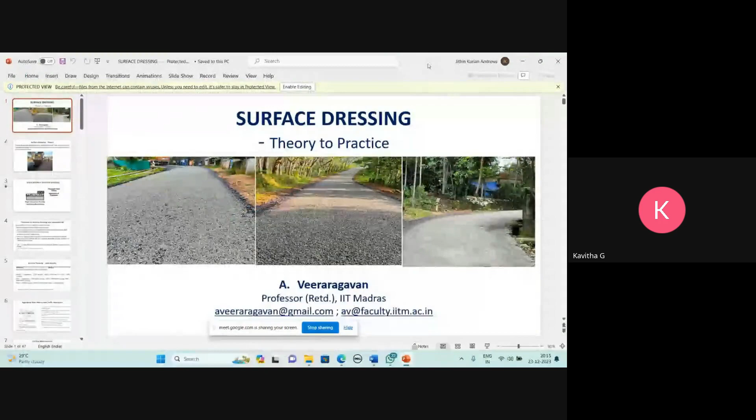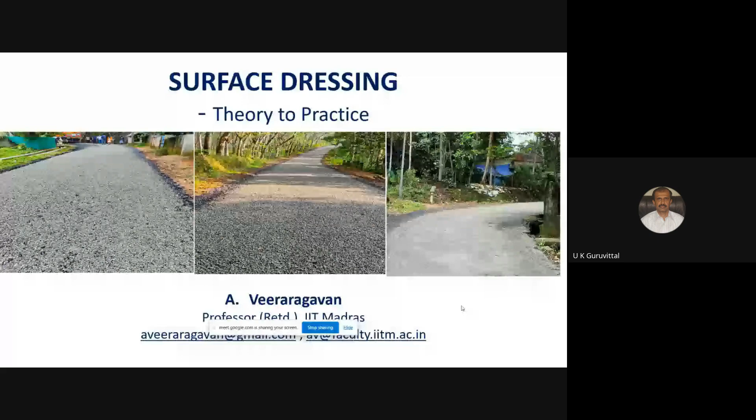There's an issue sharing the screen. Is my screen visible? Sir, it's not visible. The organizers must enable his screen sharing. Will you please enable me to share my screen? Is it visible now? No, sir, not yet. Shall I log out and log in? Screen sharing has been enabled for everyone, I believe, but that was not visible. I have to choose what to share with Google - Chrome tab, Windows, or entire screen. You can share the window. Then the PPT. What about the entire screen? You can try that. Entire screen also I have shown, but it's still not visible. Why am I not able to see my share? You can send the file to the organizer, they can share it. Try logging out and logging in again, sir. Let me try that, or else I'll send it to Jitin. I'll send the mail ID of the organizers, you can mail it to them. Let me try this. Jitin, check whether you've received the file. I received the mail, I'll share it in a minute. Good evening all. I'm very sorry that we did not rehearse sharing the screen before the webinar.

So what I'm going to talk about today is surface dressing, theory to practice. This webinar on surface dressing has earlier been conducted effectively by Professor Kandhal, and later by Professor Rajan Choudhary. Now it is my turn to share my thoughts on surface dressing theory to practice. What I'm going to tell is nothing new, it's all in the guidelines and specifications, but in about 30 minutes I will be able to present the theory, practical issues, and points for discussion.

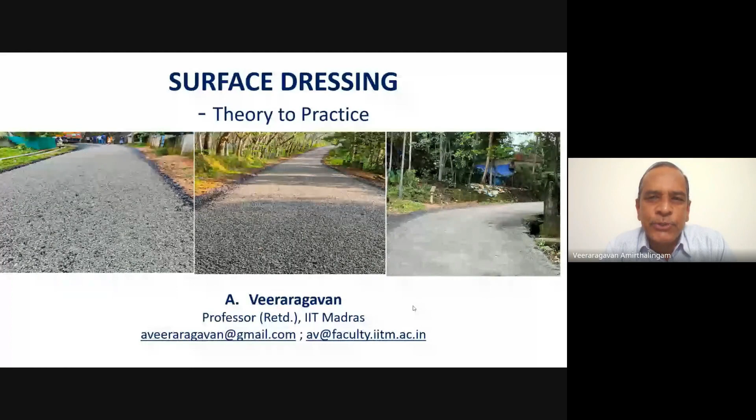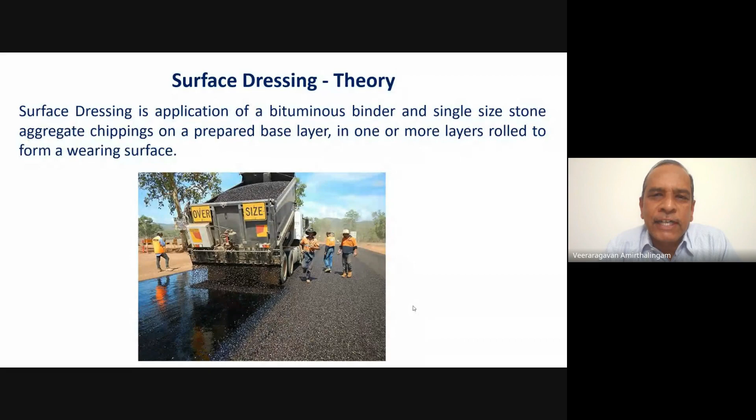Next slide. Surface dressing, as you know, is the application of bituminous binder and single size stone aggregate chippings on a prepared base layer. It can be in one layer or more than one layer, rolled to form a wearing surface. It can be used for all types of roads, from rural roads to highways. Let's go to the next slide.

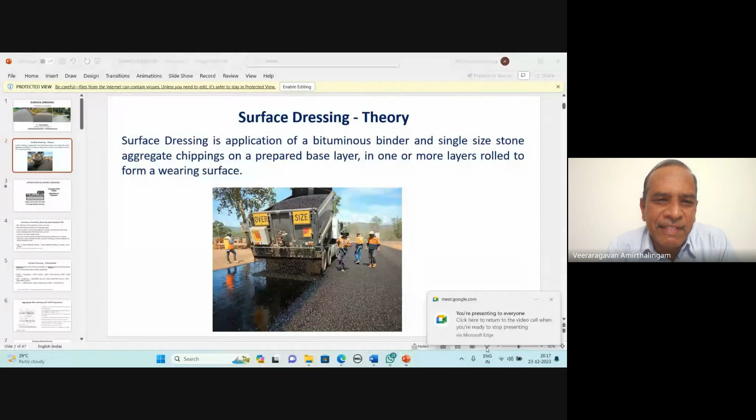Surface dressing is the application of a layer of binder on a prepared base, on which you spray a layer of aggregate and roll with a pneumatic roller. This is called single coat surface dressing or single chip seal.

On which you apply the second layer of binder and the second layer of small aggregates, which will key into the voids in the coarse aggregate, and then roll with a pneumatic roller. This is double chip seal or two coat surface dressing.

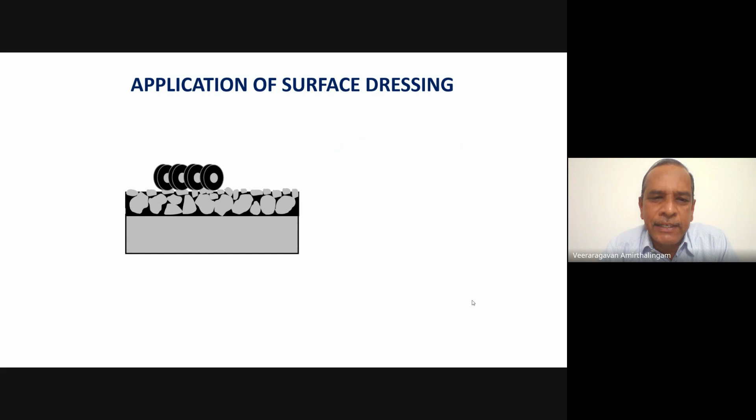So what is the function of this surface dressing and what is the expected life? It's a cost-effective treatment generally used to provide a dust-free wearing surface on a granular base. It will also serve as an impermeable layer to prevent entry of water to the lower layers. Thirdly, it arrests the disintegration of the pavement surface, and also provides a non-skid riding surface.

It can also be used as a renewal coat for periodic maintenance of bituminous surfaces. It will seal cracks, prevent raveling, and reduce oxidation of the previous or old bituminous layers. So generally, it is a very cost-effective surface treatment for low-volume roads, but can also be used as a renewal coat for high-volume traffic. Even as per the ministry, up to 2,000 commercial vehicles per day, this layer can be used.

The next question arises: what is the life of this surface dressing? As per the guidelines of Ireland, life can be 5 years for national roads, 7 years for regional roads, and 10 years for local roads.

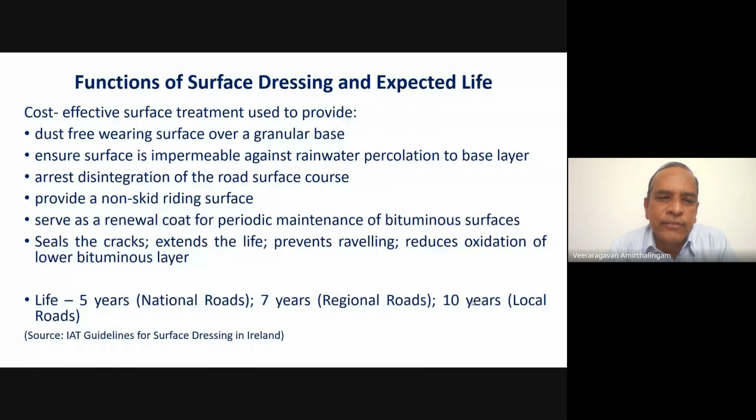What are the other limitations of this surface dressing in terms of riding quality? Remember, this surface dressing is a wearing course, generally used for low volume roads, and it does not enhance the structural strength, nor does it restore the riding quality of the surface having large surface irregularities. So if you expect a wearing surface riding quality similar to conventional BC, you may not get it, but it is comparable to thin layers.

The roughness for a very good road as per IRC 82 is 3,200 millimeters per kilometer, comparatively for MSS it will be 2,600, and for premix carpet it may be 2,800 millimeters per kilometer. For a fair road it can be between 3,200 to 3,800, whereas for MSS it may be from 2,600 to 3,200. For a poor road it can be more than 3,800.

So generally, it may not give you a smooth surface, but it will be a durable, long-lasting wearing course, especially for low volume roads.

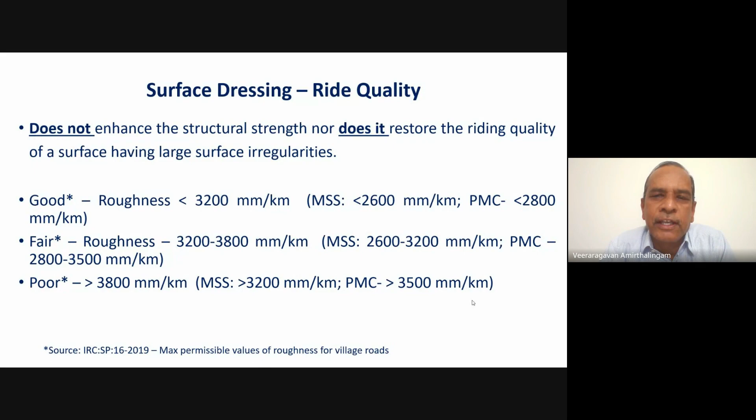So what we do is apply a layer of binder. There is something called the average least dimension of the aggregate. If the aggregates are stacked on a surface, the average dimension is considered. This again depends upon the hardness of the surface and the traffic level. We should select the aggregates accordingly.

Initially, when the aggregates are dropped from the spreader, the voids will be around 50%. After rolling, it reduces to 30%. And with traffic, finally it may be around 20%. So the optimum thickness to which the binder can be spread can be about 75% of the vertical dimension of the aggregates. If you have more binder, it will result in bleeding. The binder's function is only to hold the aggregates together, and if you have less binder, it results in raveling and loss of aggregates.

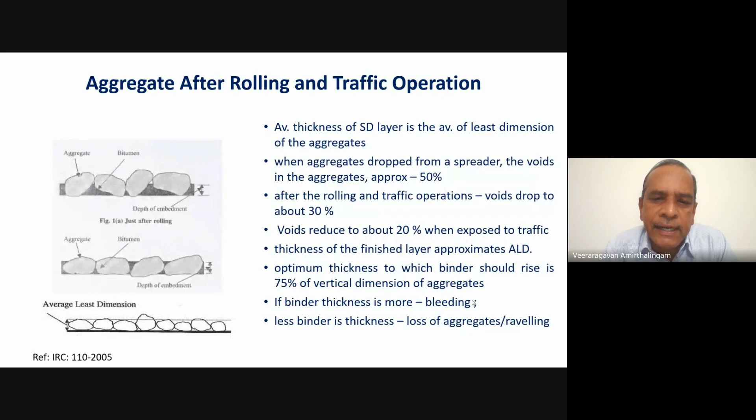What are the grading requirements? Generally, as per the specification, there are 4 gradings: 19 millimeter, 13 millimeter, 10 millimeter, and 6 millimeter. These are single size aggregates. 13 mm means passing through 13.2 and retained on 9.5. Passing 10 mm size means passing through 9.5 and retained on 6.3. Even though there are 4 gradings, generally we adopt 13 and 10. 19 is permitted depending upon the traffic level and hardness of surface, and 6 is generally not used, though specifications exist and we can choose them as well.

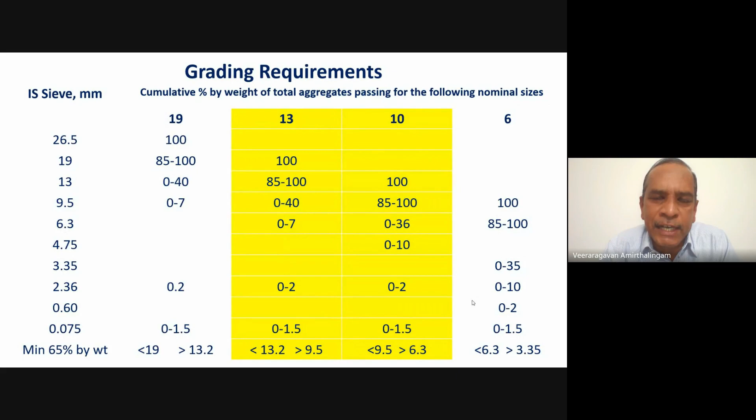So where can it be used? We can use either a paving grade bitumen or a rapid setting emulsion. The weather conditions recommended per specifications: minimum air temperature for paving grade bitumen is around 16 degrees centigrade, whereas for rapid setting emulsion it can be 10 degrees centigrade. The surface should be dry whenever you use a penetration grade or paving bitumen, but it can be dry or damp when using an emulsion.

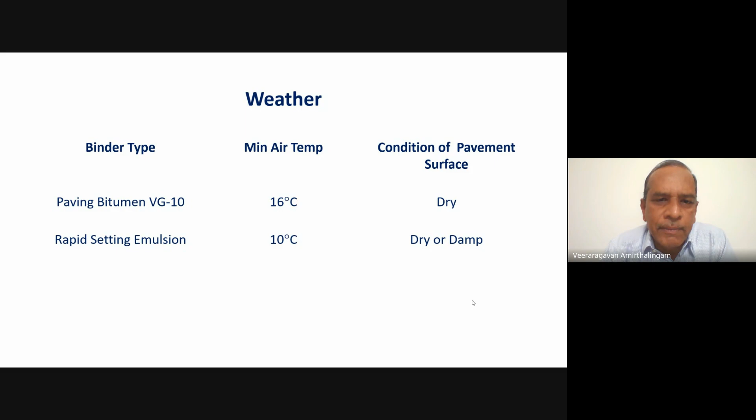For any pavement wearing course that you want to lay, you have to prepare the base. The surface has to be shaped because surface dressing will not ensure a good, perfect profile. The profile should be made up in the base course, which can be water bound macadam or wet mix macadam.

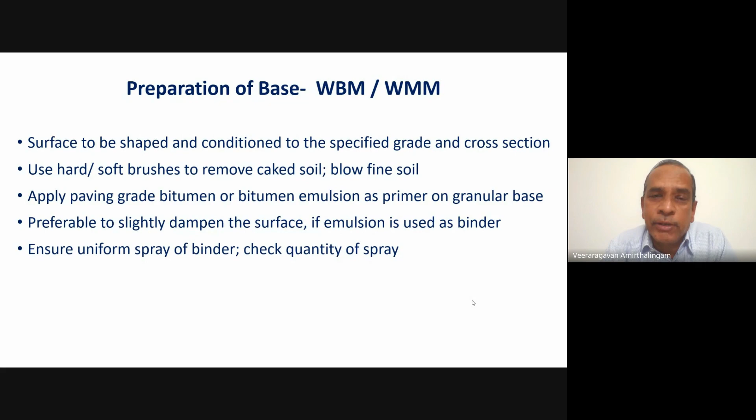You have to use hard or soft brushes to remove the caked soil or blow away this extra fine soil. You can apply either a paving grade bitumen or an emulsion as a primer on a granular base, preferably slightly dampened whenever you use an emulsion as the binder. But you have to ensure uniform spray of the binder and check the quantity of spray.

These are the quantities of binder to be used for primer. For wet mix macadam and water bound macadam, as per specifications, the rate of spray varies from 0.7 to 1. For a mechanically stabilized base, it varies from 0.9 to 1.2. For a gravel base, crusher run macadam, or crushed rock base, it can vary from 1.2 to 1.5. So before you apply surface dressing on a granular layer or a stabilized layer, the prime coat must mandatorily be applied.

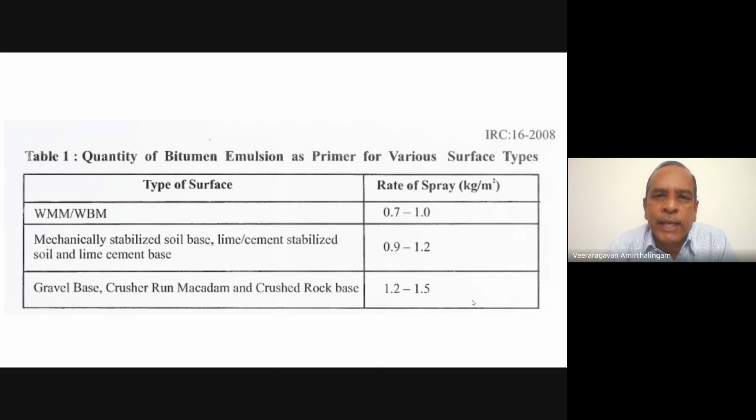The binder, as I mentioned, can be either a paving grade bitumen of VG10 or a rapid setting cationic emulsion. The temperature at which this can be applied is 165 to 175 degrees centigrade for paving grade bitumen, whereas for rapid setting emulsion it can be between 50 to 70 degrees centigrade. The bitumen content should be at least 65% by weight as per IRC 110/2005.

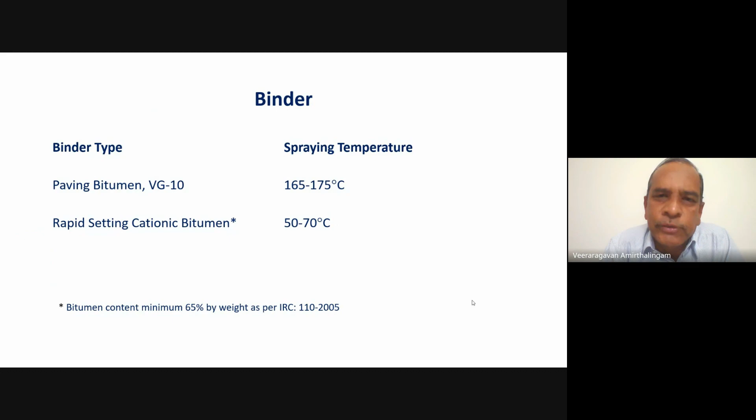The aggregates, as I was mentioning, are single size aggregates. 13 means 13.2 passing, retained on 9.5. 10 means passing through 9.5 and retained on 6.3. These are the two most commonly used aggregate gradations, which is why I'm not talking about 19 and 6.

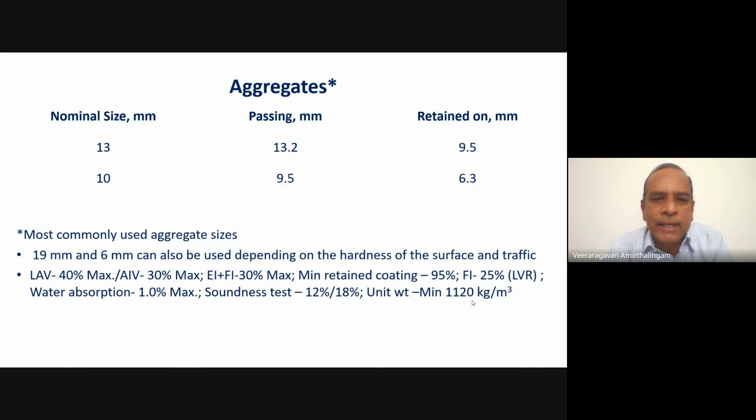This aggregate should be clean. This is an issue that needs discussion at the end. The aggregate should be free of dust. How to ensure the aggregate is free of dust is a question I think we'll discuss with the panelists. Washed aggregates are preferred, but we have never been washing the aggregates, so dusty aggregate will be an issue.

Second, the mechanical spreader should be calibrated. You have to apply the aggregates at a uniform rate as per specifications. Here again, you can use either uncoated aggregate or pre-coated aggregates. Generally pre-coated aggregates are preferred, but again the field engineers have their issues and concerns on pre-coating the aggregates. This is a second point which I request the panelists to consider.

Pre-coating is generally done with 0.75 to 1% bitumen by weight of aggregate. You have to cure it for at least 1 week before application. Since the dosage is only 0.75 to 1%, these pre-coated aggregates will be free-flowing, not sticky, and there's no problem with transportation either. But there can be some delay in setting of the emulsion, though not a very significant issue. So you can use either uncoated or pre-coated aggregate; the dosage of the binder will vary. These are issues that need debate and discussion at the end.

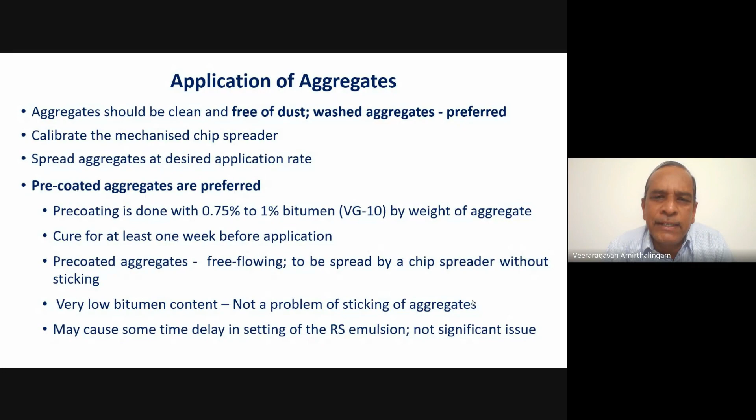So this is how you can see there are two cases wherein the binder is first applied. This binder serves as a waterproof layer, which is the most important advantage of this surface dressing. Secondly, you can apply aggregates. There can be issues where we don't have the chip spreader - how do you go about it? I am coming to that issue subsequently.

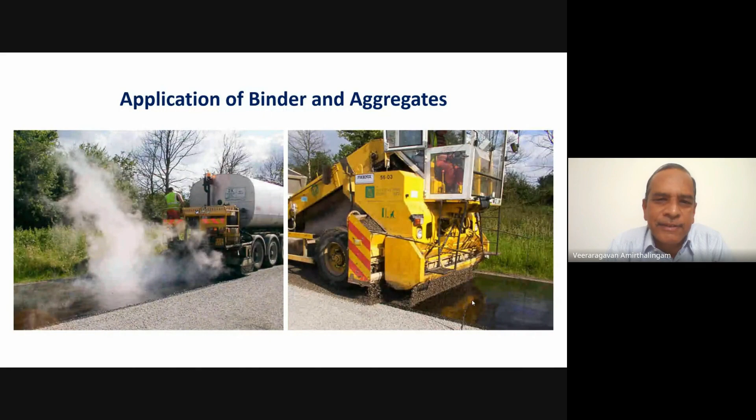As can be seen on the slide, on the left you first apply a layer of bitumen, on which you apply a pre-coated aggregate. On the right, you are able to see a chip spreader, which is an attachment to a tipper, which is also available.

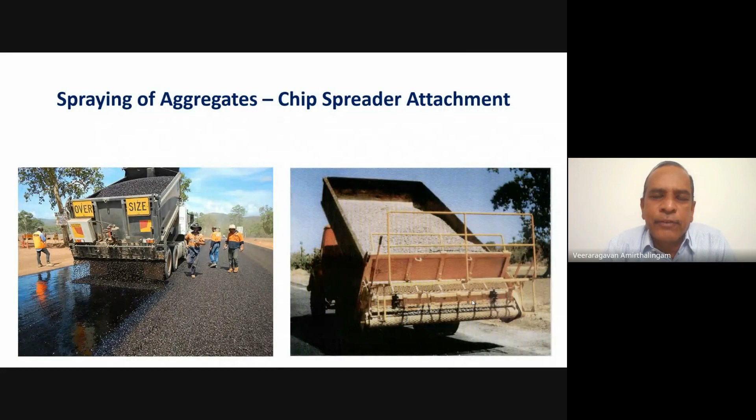You can use either pre-coated aggregates or uncoated aggregate as per the specification. But considering the advantage of pre-coated aggregates, it is preferable to use pre-coated aggregates. Let us talk about the issues and concerns of using pre-coated as well as uncoated aggregates.

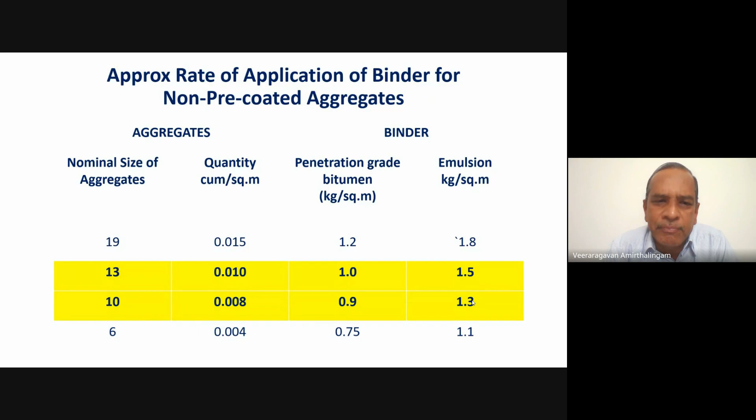The application rate for binder for non-pre-coated aggregates: when you have 13 millimeter aggregate using emulsion, it is 1.5 kg per square meter. When you use 10mm aggregate, it is 1.3 kg per square meter. When you use bitumen VG10, it can be 1 and 0.9 kg per square meter. But when you use a pre-coated aggregate, the binder quantities are 0.8 and 0.7.

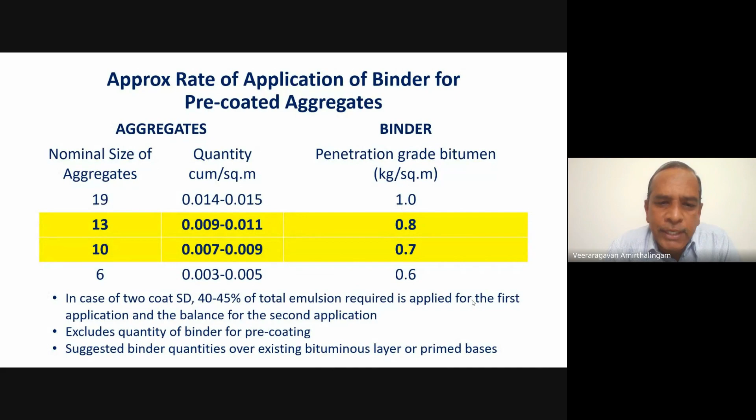In case of two coat surface dressing, 40 to 45% of total emulsion required is applied for the first application, and the balance is for the second application as per IRC 110. But this quantity that has been prescribed excludes the binder used for pre-coating. So these are the binder quantities for the existing bituminous layer or primed surfaces.

Rolling: the preferred rolling is pneumatic roller. We can also use a steel wheel roller, but when you use single size aggregate with a steel roller, generally the aggregates get crushed. Whereas a pneumatic roller has a kneading effect, ensuring better embedment of the aggregate on the binder layer, hence pneumatic roller is preferred. Professor Kandhal will further substantiate this with his experience on why pneumatic roller should be preferred over steel wheel roller.

You have to use a 60 to 80 kilonewton tandem wheel roller only if pneumatic roller is not available. Avoid excess rolling. Continue rolling until the aggregate particles are firmly embedded in the binder. This is the difference between premix and this layer of surface dressing: here the object is not to ensure density of compaction, but to ensure that aggregate particles are firmly embedded in the binder. This is possible with a pneumatic roller, hence it is preferred.

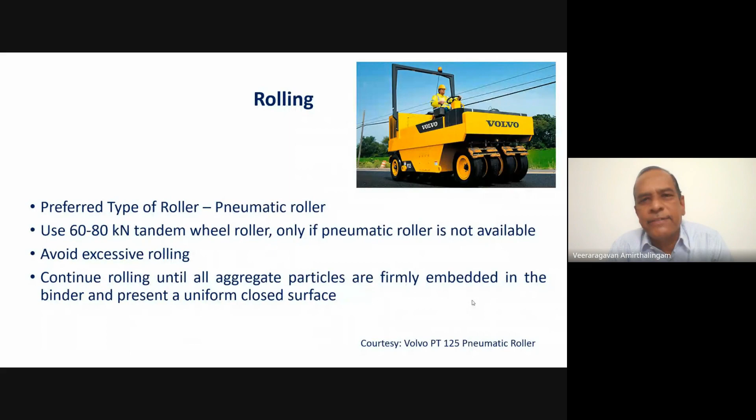The second coat of surface dressing is preferred in high rainfall regions as well as where traffic level is high. This should be applied after the first layer. Generally it is said the second layer should be applied after allowing the first layer to traffic for 2 to 3 weeks, but we have been attempting to lay the second layer simultaneously. This is another point of discussion we'll take up at the end.

The aggregate used should key into the voids in the larger size aggregate, as was shown. They follow the same procedure of applying the layer of bitumen and spraying the aggregates which will key into the voids in the larger size aggregate.

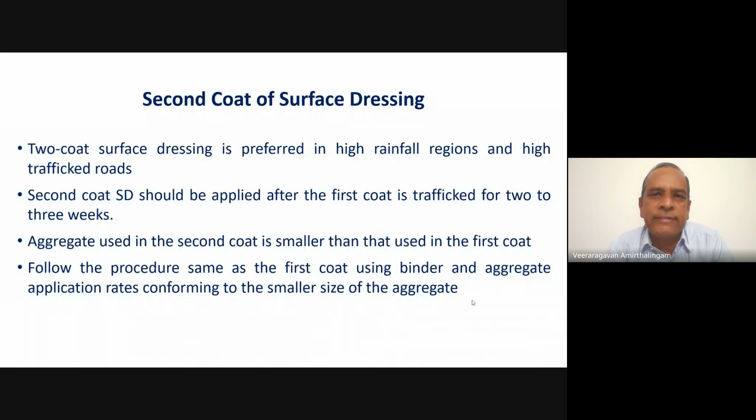After this, when bitumen emulsion is used, open the road to traffic not earlier than 4 hours after rolling, preferably after 24 hours. The general rule is to open the road to traffic on the following day. If unavoidable, limit the traffic to 20 kilometers per hour.

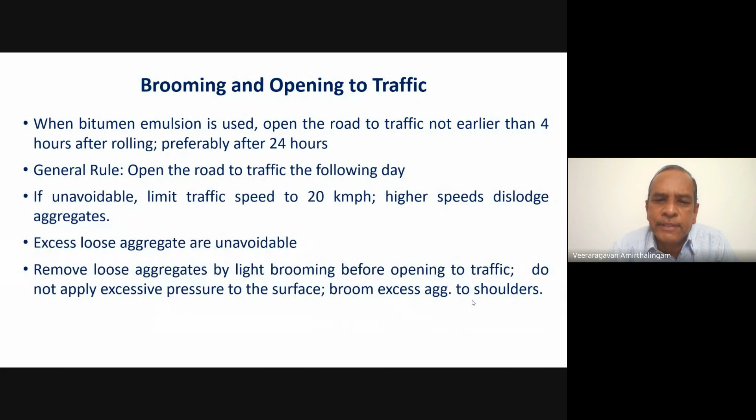Why limit speed? Because at high speeds, before the emulsion breaks, aggregates become loose. If you allow traffic, the aggregates will get dislodged, so loose aggregates are unavoidable. This is a common problem, a common complaint - whenever you lay surface dressing, there are loose aggregates. You can remove the loose aggregates by light brooming before opening the road to traffic, but don't apply excessive pressure to the surface. If there are excess aggregates, they can be broomed to the shoulders.

Quality control: any construction requires quality control. The quality control checks are very simple - check on gradation, check on binder application rate, check on rate of spread of the aggregates, check proper embedment of aggregates in the binder, at least 70 to 75% should be embedded. You check the spray of the binder using a felt.

You can take the weight of the felt before and after, that tells you the rate of spray. You can check the spread of aggregate using a tray, before and after. Also you can check the embedment of the aggregate, that at least 70 to 75% of the aggregate should have embedded into the binder layer. So these three checks can easily be done at the site - no costly quality control equipment is required to check the quality of construction in the field.

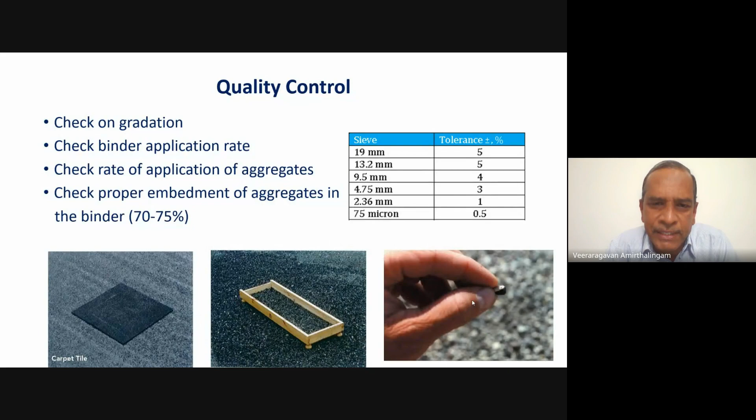The chip spreader calibration is also possible. You can spread a felt or cloth, take the weight before and after, that tells you the rate of spread of the chip spreader. This can easily be used for calibration of the rate of spread. Number one, the opening; number two, the speed of operation of the unit - both are to be controlled.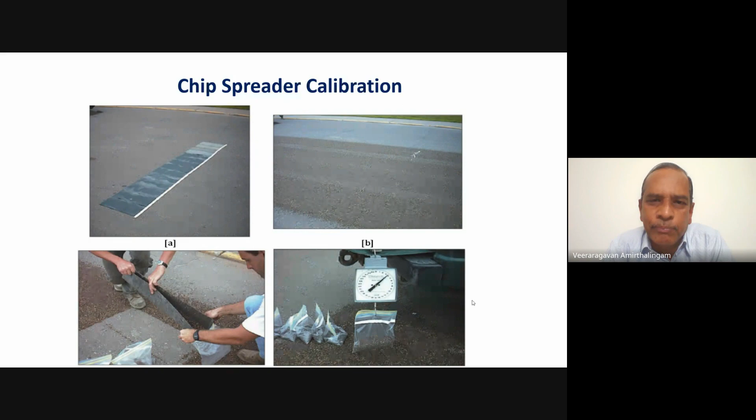Also, you should check the uniformity of flow of the binder. Check whether nozzles are clean, whether rate of spray is uniform. You can check the weight of the binder in these silos before and after spraying, which will tell you the quantity of spray of the binder. The rate of spread also needs to be checked.

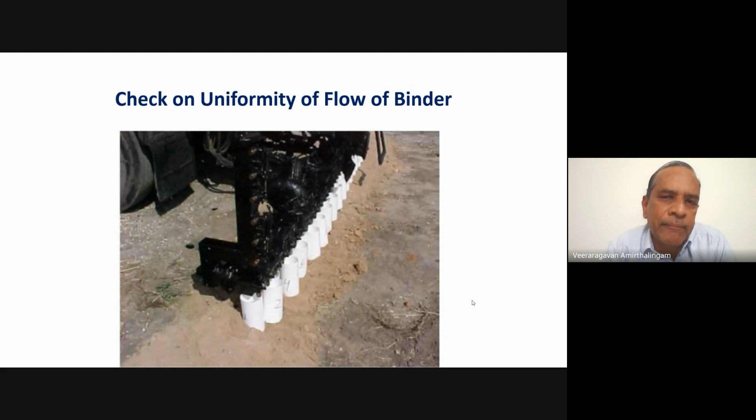There are simple tests to distinguish between rapid setting, medium setting, and slow setting emulsion, available in the do-it-yourself booklet prepared by Professor Kandhal and Professor Rajan Chaudhary. Mix about 5 grams of emulsion with about 100 grams of moist aggregate. If the mix can be made with almost 100% coating, it is MS or SS type. If the emulsion sets or breaks without coating the aggregate, it is RS type, which is generally preferred for surface dressing.

To differentiate between medium setting and slow setting types, about 5 grams of emulsion with about 100 grams of stone dust: if the mix can be made with about 100% coating, then it is slow setting type, otherwise it should be medium setting type. So you have to check what type of emulsion is used. Preferably, we use rapid setting emulsion.

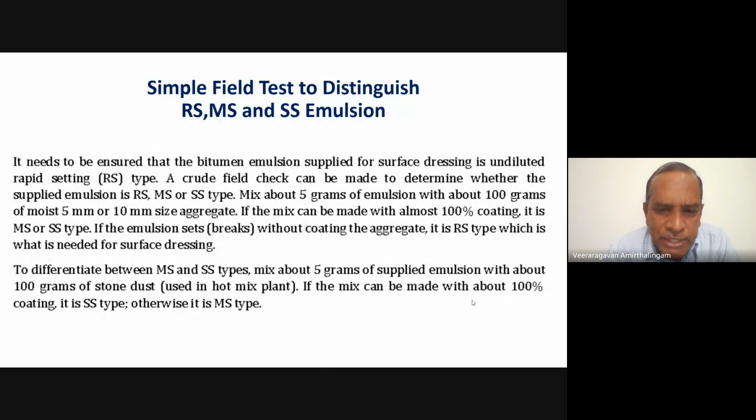This is the theory - how the binder has to be applied in two coats, rolling, and then opening to traffic. Now let us come to practice.

This is a section where surface dressing was applied using a chip spreader. As can be seen, the aggregates are dusty - you can find the dust flowing along with the wind.

You can also see the binder getting applied using a binder spreader, wherein some of the nozzles are clogged on the right extreme, so there is no application of the binder there. For ensuring good quality control, uniform spread of the binder becomes mandatory.

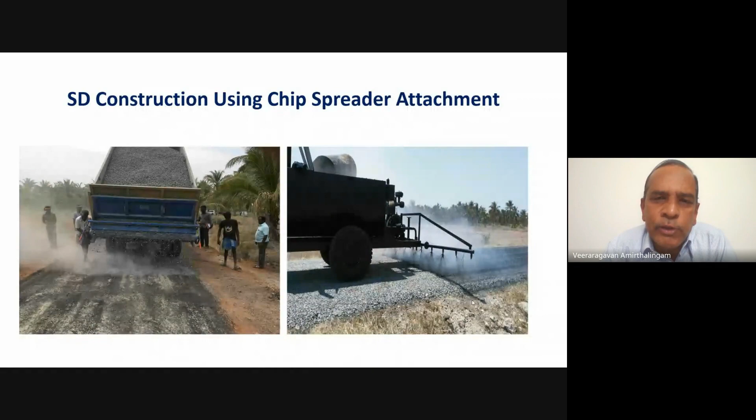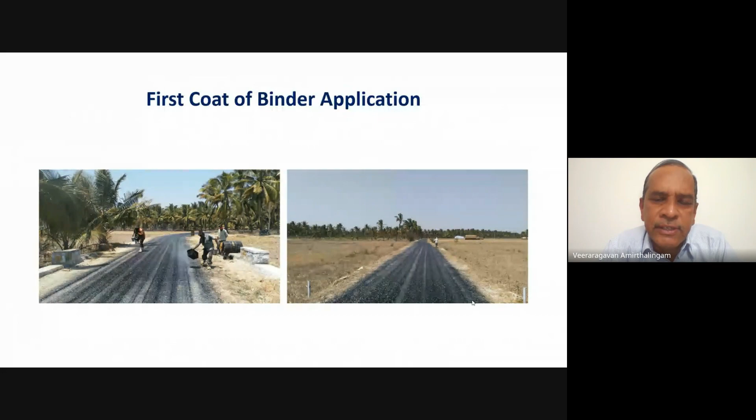Since the bitumen or emulsion has not been spread uniformly, you'll find that at some locations there is a white band, which means the nozzles are clogged and the spray is not uniform. So you may have to adjust by using a drum.

This is a chip spreader attached to a tipper. You can find that the road has got a good camber. The aggregates, single size aggregates, are uniformly spread on the prepared surface.

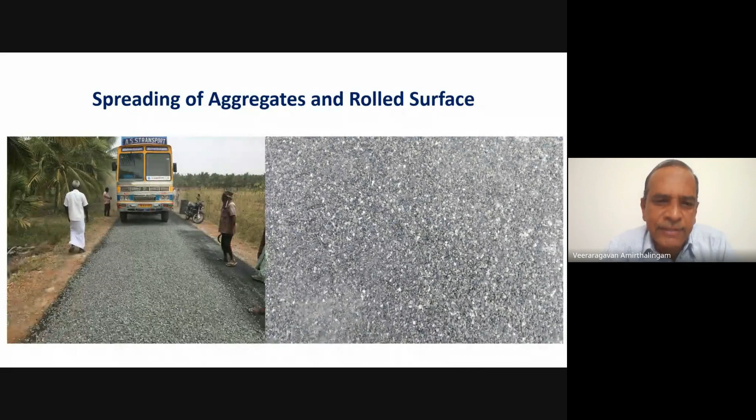But the issue at this point, in this section where we attempted to construct the surface dressing, was that it was over a layer of wet mix macadam. Unfortunately, for rural roads, they do not attempt a mix design for wet mix macadam, with the result that there's too much of...

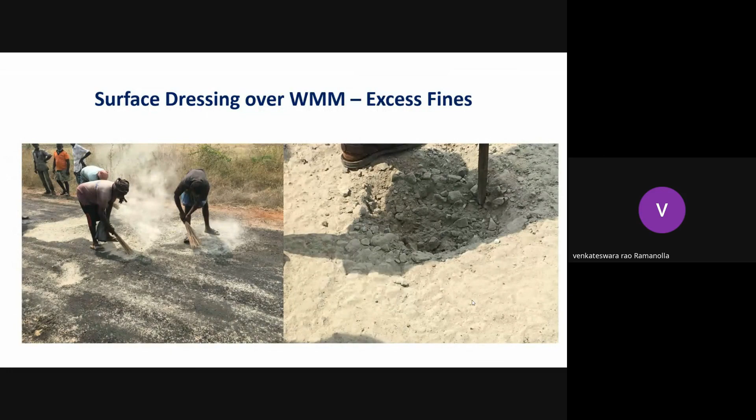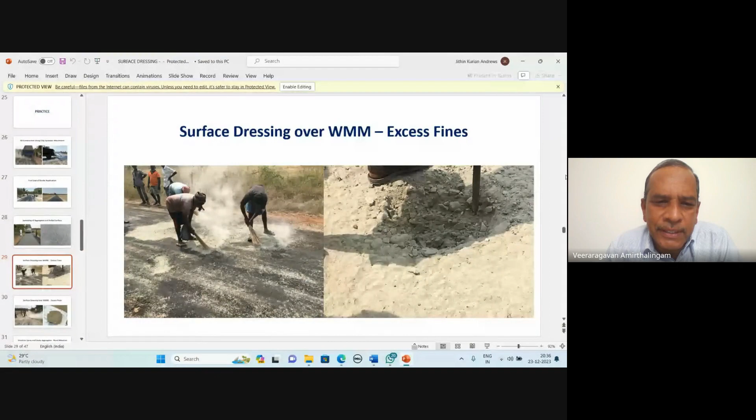You can continue, sir. Yeah, but yeah.

In the case of surface dressing, when there are excess fines, you can see that when it's getting broomed, you find too much fines on the wet mix macadam. The issue is that when you have excess fines in the wet mix macadam, all your primer will get into the wet mix macadam, and there is no binder left to hold the loose particles together and ensure bonding with the next layer being laid.

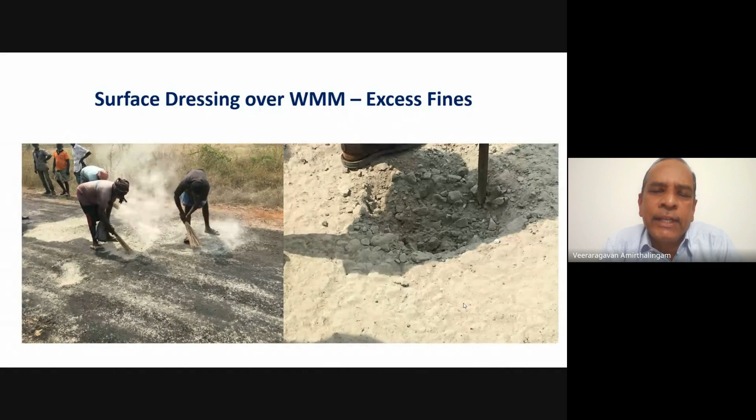You can see that when they're blown with a compressor, there's too much fines. Therefore, whenever you want to use surface dressing over wet mix macadam, ensure that there's a mix design and the fines are minimized as much as possible. You have to remove all the loose dust from the surface, and the aggregate should be exposed before you lay the prime coat and the layer of bitumen.

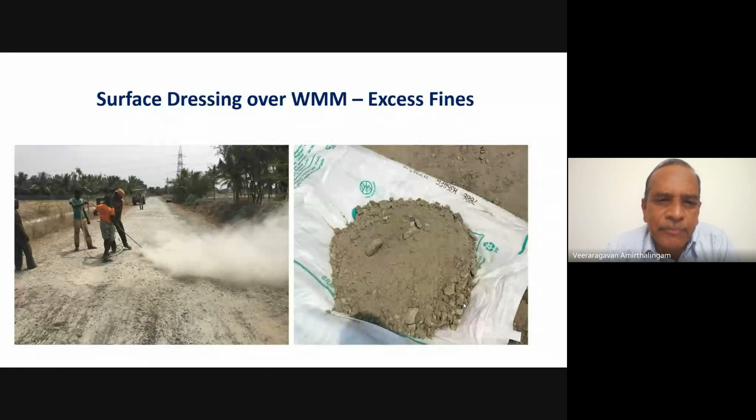You can see here that on both ends, the sprayer is not working, so there will be no bonding on both ends. As can also be seen, the aggregates are not washed - there's a lot of dust. When there's dust on the layer, it will not have embedment with the aggregate, or it will come out. This is one of the reasons why the loose aggregates come out when exposed to traffic.

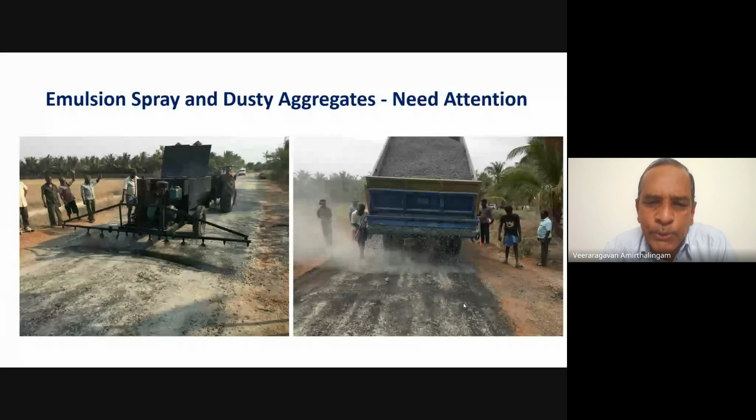This is a case of a mechanized emulsion sprayer and chip spreader being practiced in Kerala. Hincol has imported this equipment for demonstration purposes.

So it has got a tanker for the emulsion, a container to hold the aggregates, and a spreader. We can extend the spray bar up to 4.4 meters, so the width of the spreader can be controlled.

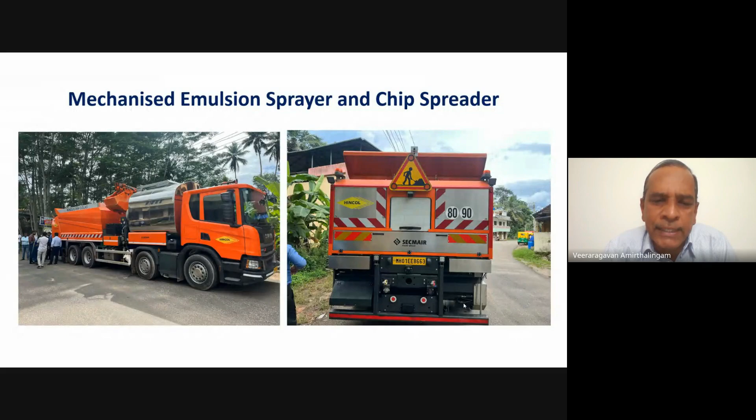Next, you can see there are two spray bars. The first one sprays the emulsion, the second sprays the aggregates. As shown in the earlier photographs, normally you apply a layer of emulsion, allow it to break, then spread the aggregates. But in this case, both are done simultaneously - the first spray bar sprays the binder, the second sprays the aggregate.

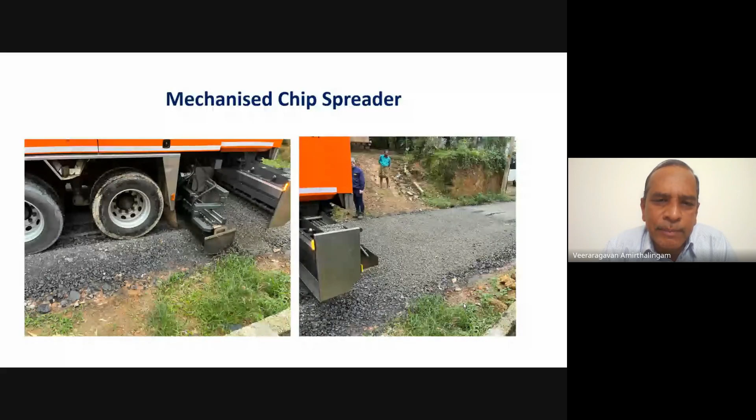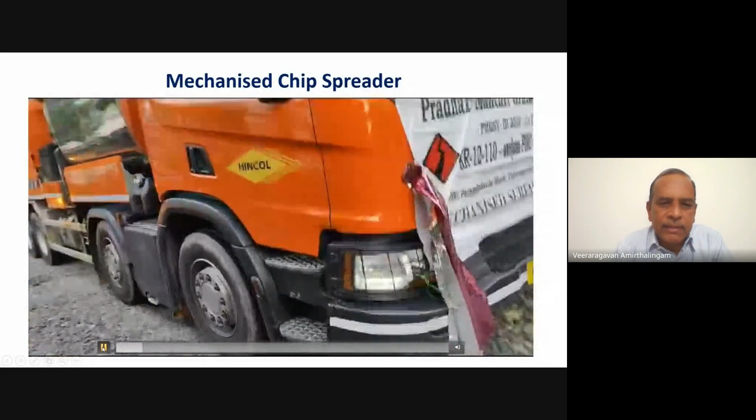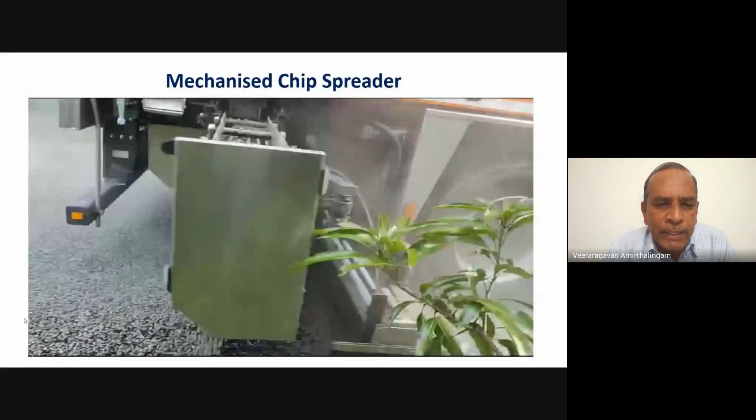As can be seen, you'll find a layer of binder followed by a spread of aggregates. Both are done simultaneously. Since there are adequate voids, the emulsion breaks and is able to hold the aggregates together. You can see the aggregate spray bar extended for the entire width of 3.75 meters.

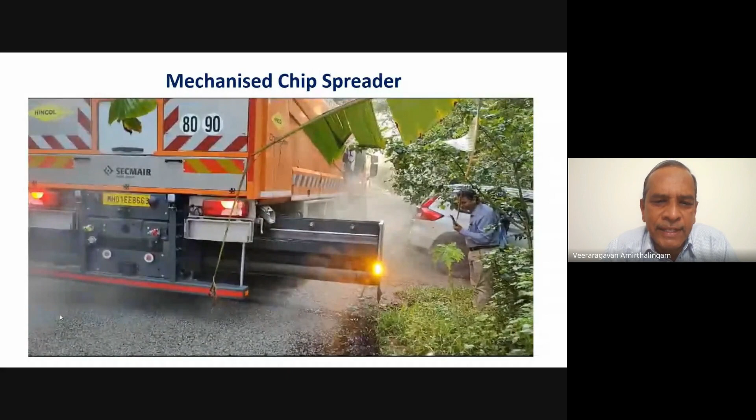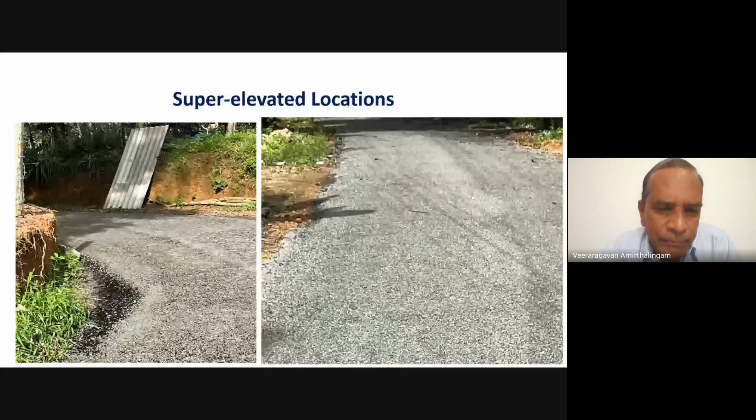This is the finished surface. One of the complaints we received was that the aggregates are loose. Secondly, in super elevated locations, the emulsion flows to the lower end. It's an issue, but not a major one that needs attention here.

Loose aggregates on the surface is an issue. As I mentioned in the beginning, loose aggregates will be there because not all aggregates get embedded. But if you use a pneumatic roller and compact well, it's possible most particles get embedded into the binder and very little loose aggregate remains. With traffic, the aggregate surface will be dry enough to take up the traffic.

However, when they tried to excavate and check whether the layers are loose, they found the surface tough - it's difficult to excavate any portion to check whether the bonding is there or not.

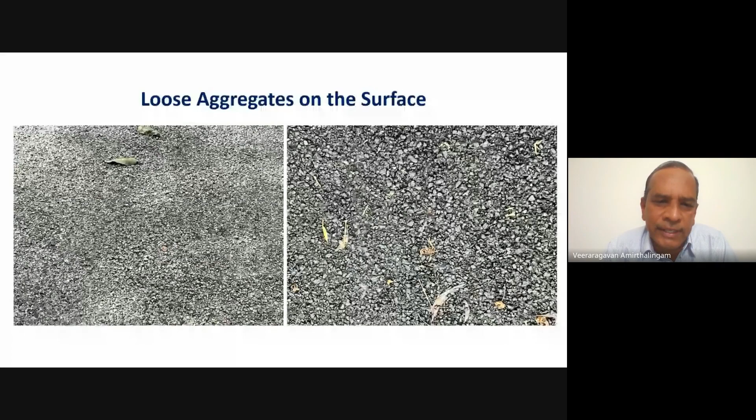So these are finished surfaces of mechanized surface dressing. I saw this last week in Kerala - it's good, a 2-coat surface dressing. Except for the loose aggregates, there cannot be any other complaints from anybody. With 2 layers surface dressing, this may be adequate to cater to low volume traffic.

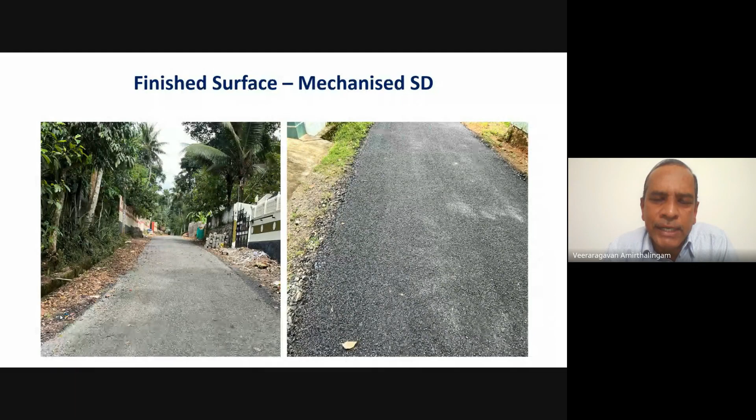If you compare with the Indian specification, in Ireland they also have a 10-14, which means 14 mm aggregate, we have 13.2. They have 10, we have 9.5, so these aggregates at 9.5 are comparable with international specifications - nothing more, nothing less. Apply a layer of binder with bigger aggregates, then a layer of binder with smaller aggregates. The procedure is the same whether it's India, UK, or Ireland. So we are adopting one of the best practices used elsewhere in the world.

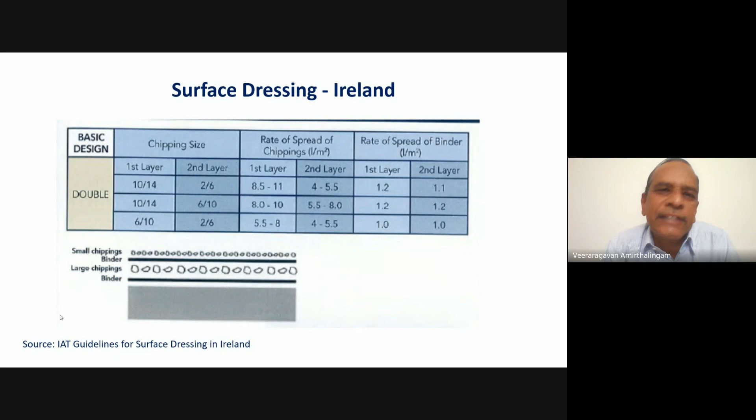But there's a lot of reluctance among Indian engineers. We'll discuss that subsequently.

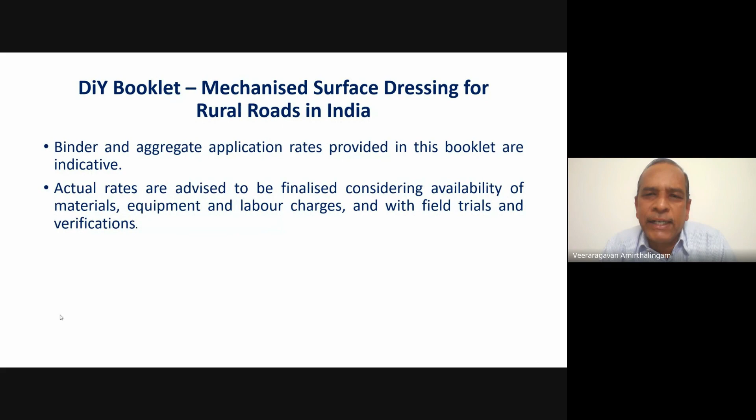In the do-it-yourself booklet, which has been shared with all of you, the binder application rates are already specified. However, the code guideline also says we have to consider the availability of material, equipment, labor charges, and field trials and verifications. From the Kerala experience, we found perhaps we may have to increase the quantity of emulsion applied on the first coat, which may reduce the second coat - but 1.5 kg per square meter of emulsion, we found we should have a relook, and if needed, modify based on field trials.

This is something everybody will be interested to know - what are the cost economics of using surface dressing? I could get the cost economics from Assam, Andhra Pradesh, Gujarat, Karnataka, Kerala, Madhya Pradesh, Tamil Nadu, and Uttar Pradesh. For Kerala, the cost of a single coat surface dressing is 124 rupees 82 paise, whereas for 2 coat it is 210 rupees. Whereas the cost of premixed carpet is 302 rupees, and for mixed seal surfacing is 272 rupees.

If you look at Tamil Nadu, 95 and 174, 279 and 205. So you can see, for any state, the cost of surface dressing is cheaper than premixed carpet and mixed seal surfacing. Since there are 2 layers of bitumen, they serve as a waterproof layer, ensuring a durable, long-lasting surface, and it is cost-effective as well. We can discuss this subsequently.

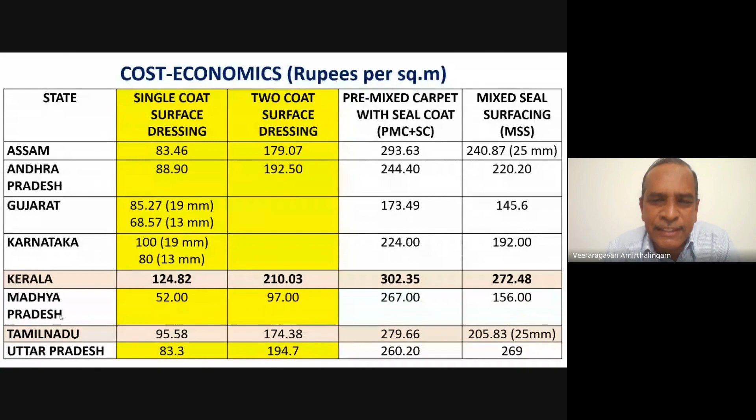Second, aggregates are not getting washed in the Indian scenario. Aggregates are dusty. Is it possible to wash the aggregates? If so, how should it be done?

Third, in one case we allow the emulsion to break before the application of aggregates, whereas in the mechanized spreader which I showed just now, imported from France, we apply the emulsion and then spread the aggregates simultaneously. Is that okay?

Fourth, should I use an uncoated aggregate or can I use a pre-coated aggregate? What are the pros and cons? Why is there hesitance and reluctance for using pre-coated aggregates? The field engineers feel pre-coating is not possible.

I think Professor Kandhal, based on his rich experience, can enlighten us as to how pre-coating was done in Jaipur and other places. The fifth is this dust accumulation.

As per specification, the second coat can be applied after 2 to 3 weeks. Can it be earlier? The one issue that engineers told is that if there's a delay, there will be dust accumulation, and it's difficult to remove the dust. Can it be accelerated? In Kerala, it was done immediately. Is that okay or does it need a change?

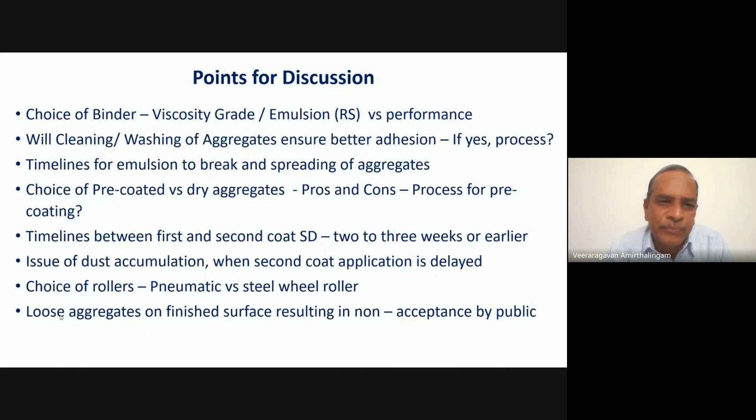Next, rate of spread of aggregate emulsion, based on experience. We personally feel that 1.5 kg per square meter of emulsion is found to be a little lower. Can we have a few more trials? We tried a few more trials in Kerala. Perhaps Dr. Anil will study and then tell us the comparative performance.

Calibration of the chip spreader is to be done. In the case of construction of WBM and WMM, the issue of fines in the wet mix macadam has to be cleaned before the layer of prime coat is applied. What should be the criteria for application of single coat and two-coat surface dressing?

Cost economics - we very clearly said that surface dressing is cheaper than premix carpet with a seal coat, or even mixed seal surfacing. So we need a field performance comparison with premix carpet and mixed seal surfacing.

We should also have a relative performance study of mechanized and semi-mechanized labor-based methods, because that is again requested by Mr. Pradeep Agarwal from NRIDA - in India, should we adopt manual construction?

I think we need quality control. In that case, we should also ensure that quality matters - labor is secondary, the durability and performance are more important than employing more labor.

Why are engineers reluctant to use surface dressing? That is something we need discussion on. I am sure that the introduction of surface dressing theory to practice will pave way for a lot of discussion in this.